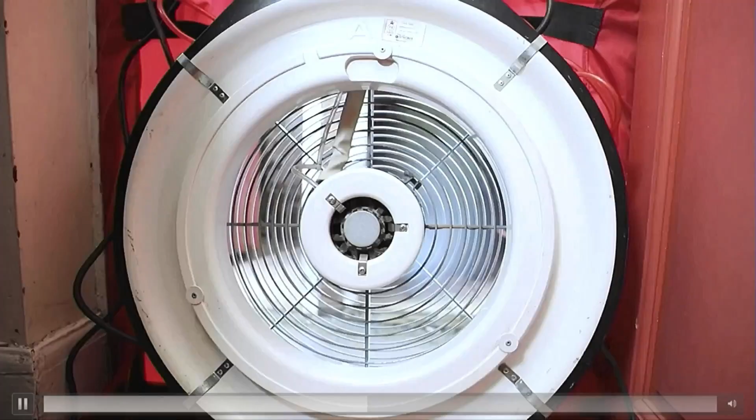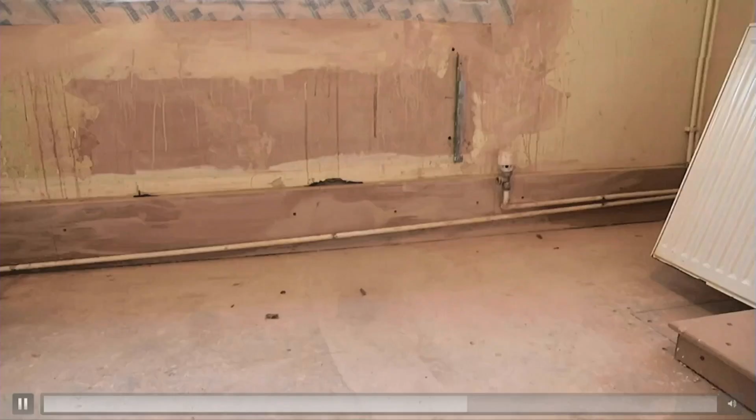We tracked the changes in energy efficiency by measuring before we did anything, the baseline stage. Then we did the retrofit work, and then we measured all of those variables again, which allowed us to see the effect that the retrofits had. Solid-walled homes can be at risk of having surface condensation, which is not a good thing to have in homes for mould growth and damp. When you insulate that wall, you tend to make the wall much warmer, so you'll have less condensation in general on the wall. But it does get a bit complicated because even with insulation, the edges can be cold, so you can still get condensation there.

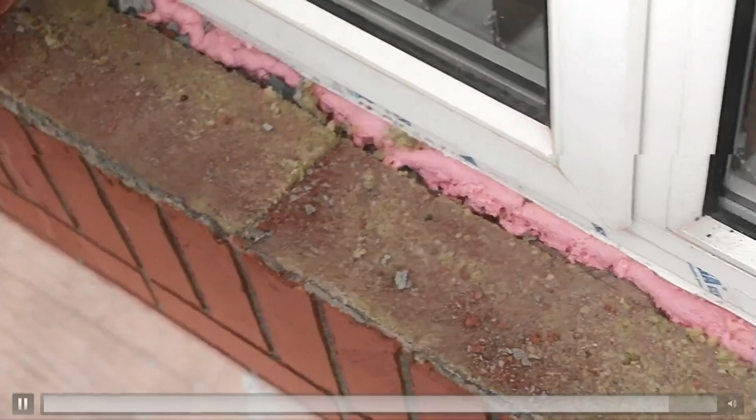So this is really good evidence to supply government with to make sure that retrofits are installed safely in homes, and this is what the whole house approach to retrofit has been designed for. So what we were able to do in this project was compare the energy performance certificate predicted savings with the measured savings. You might do an EPC and think there's loads of scope to do work to bring that number down, but actually your number was already quite low and the EPC got it wrong. I think a lot of people understand the importance of retrofit, but don't understand what can go wrong and the unintended consequences of retrofit. We understand more now about the risks of undertaking retrofits in a piecemeal approach, and we're providing more data to explain why it's very important to have a whole house approach to retrofitting homes.

It's a bit cheesy, but it's all right.

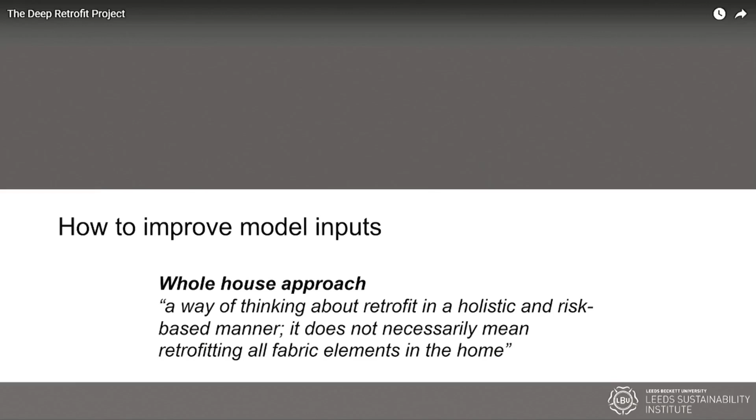So there's a much more dynamic way of introducing the project than me talking about it. So you've heard a little bit there, trying to boil it down a little bit to more tangible things.

Okay, what were the actual main goals here? So we think we've provided a lot of new information on how to decarbonise solid walled homes. When we publish our reports, that's going to be one of the key findings, and we'll talk a little bit about that today. We're also talking about the whole house approach, and that's just a little bit of a quote about it.

We come across this a lot, and it makes a lot of sense intuitively to think that the whole house approach means doing absolutely everything to a home. And that isn't what the whole house approach is. The whole house approach is thinking about everything so that you're able to install the thing you're doing in consideration of everything else. That's the key difference there.

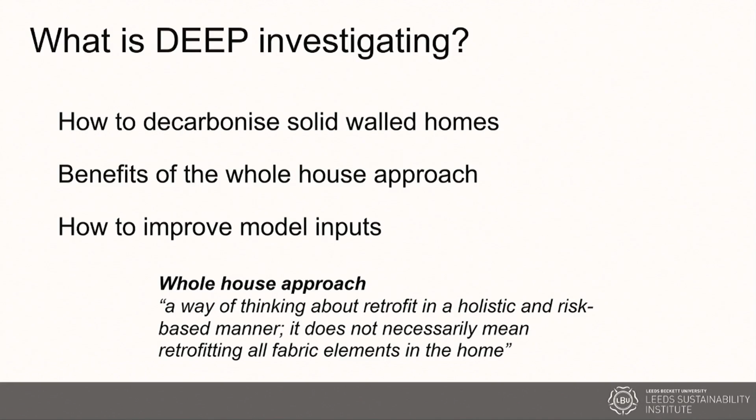And then the government - you all have EPCs for your homes, I'm sure. You all look at them and pay a lot of attention to them. But these are things that are in use and really important for government policy. So we were looking at how we could make improvements to the way in which they are undertaken, made more accurate. We'll talk about that a little bit today as well.

So the project is very big. You're only going to hear a little bit about some of the findings. We can't possibly give you an overview of everything.

So 3 universities here, it was funded by the Department for Energy Security. We had some other contractors involved as well doing some of the testing, and we're really grateful to the housing associations who let us have their homes. We rented the homes, but they let us in, which is a really, really difficult thing to get people to do.

So as I say, we started a long time ago. We are now just at the point of completing, and we hope to be able to publish the results very soon, not quite yet. So this is my last slide.

Thank you for coming, everyone. I'm Dr. Adam Hardy. However, as I am preceded by David Glew and followed by David Allinson and David Farmer, you can call me David, it's fine. I'll respond to David Hardy if necessary.

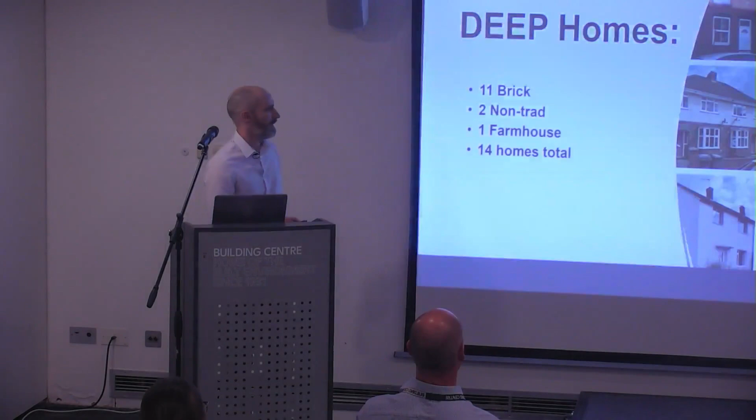So those are the homes, but what about the retrofits we did in the homes? We did 42 retrofits in total, comprising 7 air tightness retrofits. That's where we went around and sealed up any holes in the fabric that weren't supposed to be there, or for example, improved draft stripping on doors and things like that.

We did 4 loft insulation retrofits. Most homes will probably have some form of loft insulation already, but often that insulation isn't up to modern standards in terms of thickness, or if it is, it can be quite patchy because over the years it's been peeled back, or people have put things on top of it, meaning it's not so good anymore. So in those retrofits, we made a nice standard layer of insulation.

We also did 4 room-in-roof retrofits. This is where, if we had a room-in-roof room, we went up and took away all the bits of wall and the sloped ceilings in those spaces, and added insulation behind them.

We did 5 lots of retrofits where we replaced the windows and sometimes the doors. Then we did 12 retrofits where we installed floor insulation. We did quite a lot of these because it was thought floor retrofits might be an untapped market, and we were interested in what potential could be achieved if these were retrofitted en masse.

We did 5 retrofits of solid wall insulation. 3 of those were fitted externally, so external wall insulation where you fit it to the outside of the property. 1 was fitted internally, and the final one was a hybrid where we did part of it with external wall insulation and part with internal wall insulation.

And then the final 5 retrofits were what's called a whole house approach. This was alluded to in the video, but it needs a little care taken because it is not going to a property and retrofitting everything at the same time. That is not the whole house approach. The whole house approach actually refers to having consideration about how different insulation products interact with each other.

For example, often if you fit external wall insulation, that insulation won't reach all the way up the wall because the roof gets in the way, so you'll have a strip that's not insulated. A whole house approach would come in and fix that strip, probably by fitting some internal wall insulation. So it's about ensuring you have a consistent stream of insulation all around your property.

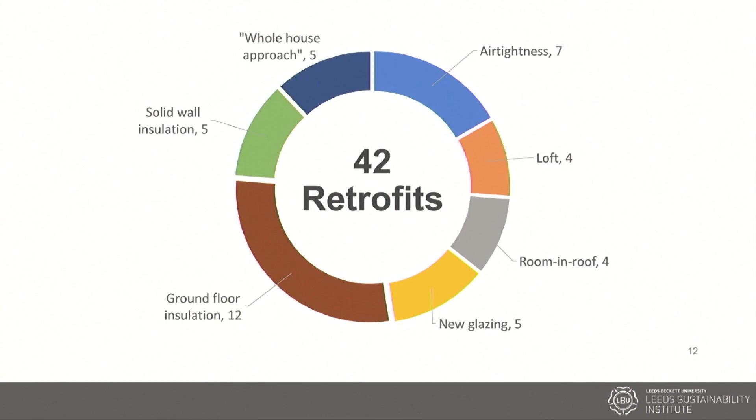So the attentive amongst you will note that if we had 14 homes and we did 42 retrofits, we must have doubled up somehow, and that's what we did. A typical retrofit strategy would look something like this. We take a home that's had nothing done to it by us, and then we did a series of tests on that home. We would test its thermal performance by something called the coheating test.

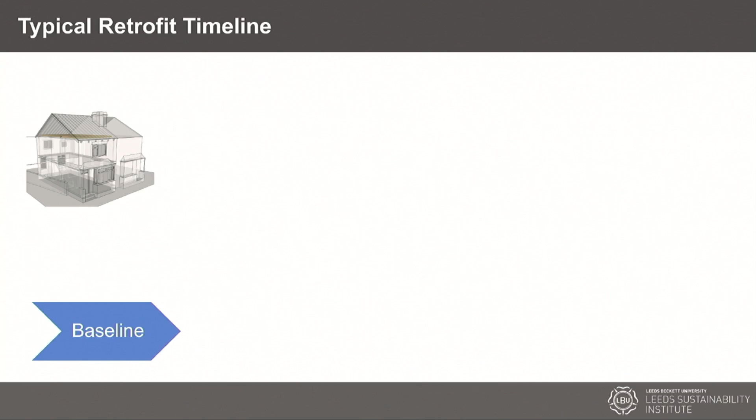We would test its air tightness. We would do thermal imaging of the home. We would do a whole bunch of other tests, and we would also do lots of models of the home, and I'll come into that in greater depth in a bit. Then we would go ahead and have a retrofit done to that property.

In this case, it was loft insulation first, and then we repeated all of those tests again. So we do a coheating test, our air tightness tests, everything. We do it again. Glazing retrofit, again, same. We repeat all of our tests.

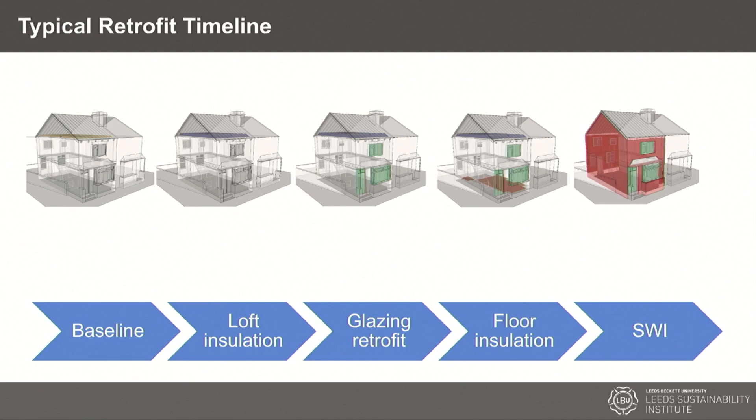The floor insulation retrofit, and then finally, for this home, we did the solid wall insulation retrofit, again repeating all of our tests. The order of retrofits, we tended to try and do from the most simple, like loft insulation, to the most technically complex, on the basis that these are probably the ones people are most likely to do, to the ones people are least likely to do.

And you can imagine if we were doing all of those tests at every stage for 14 homes, we gathered a lot of data, and that data was used to help inform the goals of the DEEP project. I'm going to touch on 3 of the goals we studied, but we've only got 15 minutes, and this is a massive project, so I'll only be able to scratch the surface. The first goal was to study the energy-saving potential of those different retrofits. How effective is loft insulation compared to room-in-roof insulation, for example.

So to illustrate how this worked, we'll go back to that house I displayed just now. I'm going to look at the results of the coheating test. The coheating test gives you a value called heat transfer coefficient, or HTC, which tells you how much heat loss you're getting from your property, so you want this value to be as low as possible. In the baseline case, when we hadn't done anything to the property, the value was 250, which is fairly high.

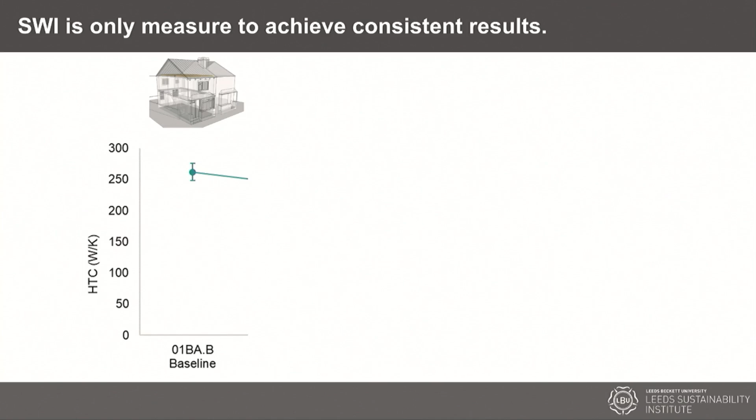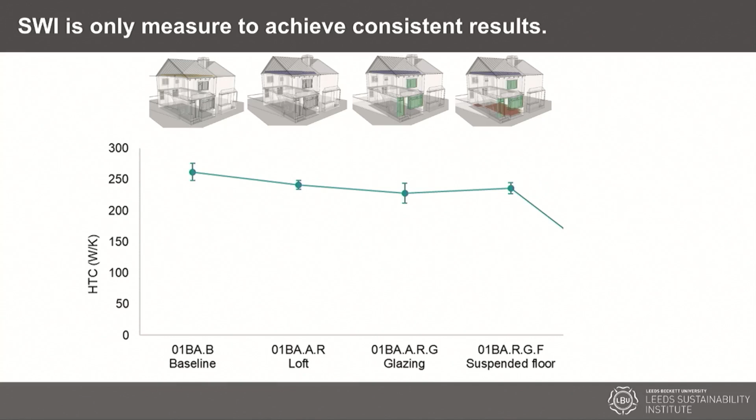We then did our loft insulation retrofit, and it looks like it drops a little bit, but actually these numbers are really close together, and statistically we can't tell the difference. So there's not a detectable impact of doing the loft insulation. We did the glazing retrofit and found the same. We didn't detect an impact from the glazing retrofit. We did the suspended floor retrofit, and again, we didn't detect one.

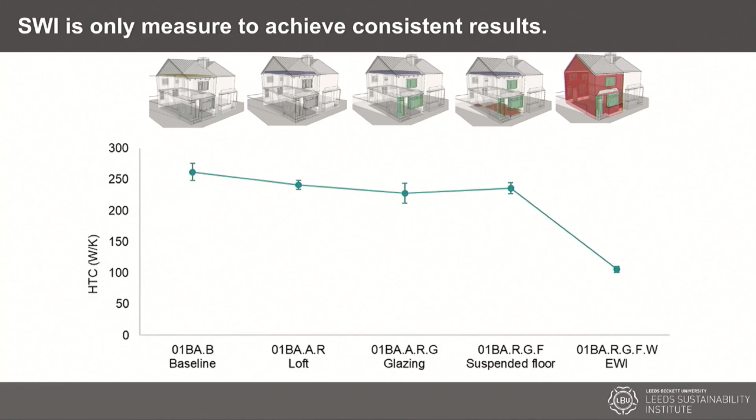Then we went and did the solid wall insulation retrofit, and there was a massive drop in HTC. We went from 250 initially down to about 100. So although this is just one of the 14 homes, the story of this home is quite typical of what we found in a lot of the other homes. The easier retrofits, like loft insulation, often didn't have a detectable impact on the heat loss of a property. Whenever we did solid wall insulation, whether internal or external, it did have a detectable impact on the heat loss. So from a policy perspective, if you want guaranteed reductions in heat loss, solid wall insulation is a pretty good bet.

On to goal 2 then. We were also interested in the unintended consequences of retrofit. And when I say unintended consequences, principally here I'm referring to moisture. If you put insulation on some surfaces, you can cause moisture to build up, which leads to mold, and none of us want mold, so we wanted to make sure that isn't going to happen.

When you did various retrofit measures, the risk of moisture tended to decrease or potentially stay the same, but it didn't get noticeably worse. When you fit the solid wall insulation, in all cases, the percentage of junctions that have moisture risk did decrease noticeably.

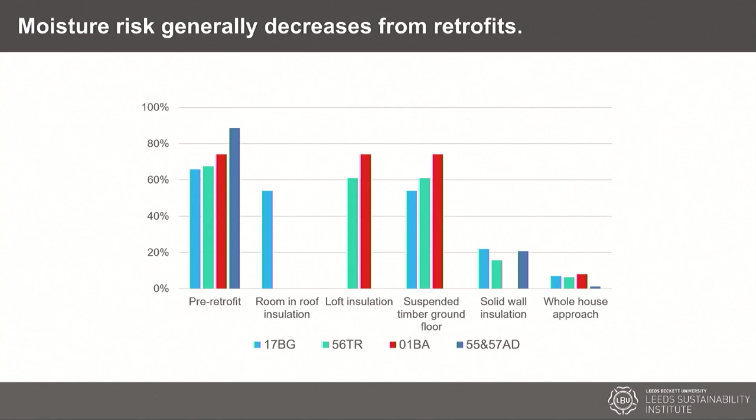But the final retrofit, the whole house approach, is the final step to really minimizing your risk of having moisture on your junctions, which instinctively kind of makes sense. As I said before, if you fit your external wall insulation and don't quite do the top bit, you're going to have a nice area of cold wall where moisture is going to form. Your whole house retrofit would come and fix that, making it warmer, thus decreasing your risk of moisture.

The third goal was to look at energy models, see if they're working as intended, and look for any ways that they can be improved. Energy models are pretty important because they're often used to assess how a property is performing and therefore what retrofits you might want to put into that property.

We're going to assess various energy models on this graph. On the x-axis is the coheating HTC, which is what we measured for the thermal performance of a property. On the y-axis, I'm going to plot the modelled HTC from a series of different models. If the model is spot on, in agreement with the coheating test, it's going to fall along the black line, so that's what the models ideally want to do.

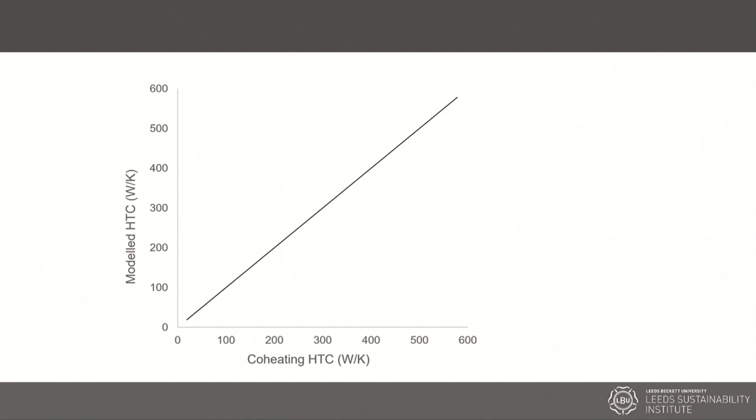The first model to look at is that generated by Energy Performance Certificates. You're probably all aware of these, as your home probably has one, and they're often used to inform retrofits, but they consistently predict HTCs which are higher than what we measured. The disagreement between the EPC HTC and the coheating HTC is worse for poorer performing properties.

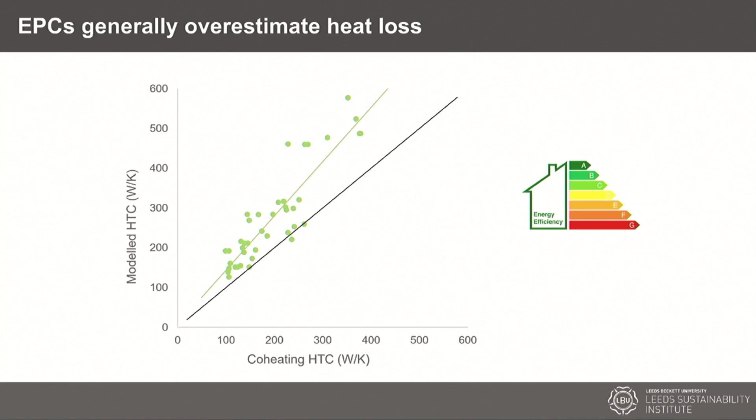This has potential implications if you're going to use EPCs to perform retrofit, because they're probably getting your heat loss number wrong in the first place, and if you're in one of the poorer performing properties, that difference is even worse. So EPCs are quite a blunt tool anyway, and built into them are lots of assumptions about how your property is behaving. So we wanted to see if EPCs could be improved by changing those assumptions to be more realistic.

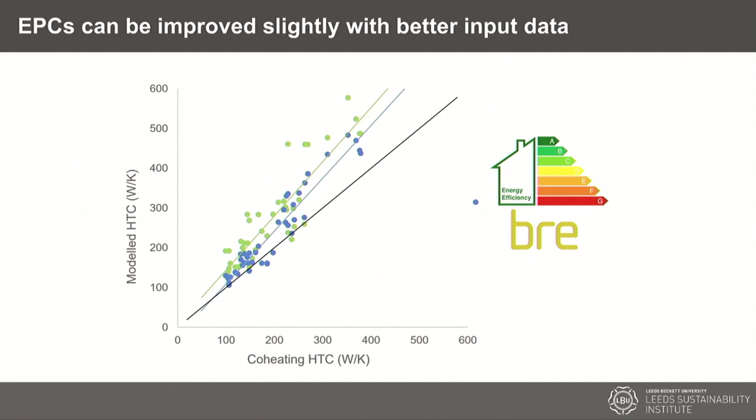So we broke into the software to change those assumptions, using a tool developed by the BRE. By changing those assumptions, the results did improve in that they've dropped closer to the black line, but still they're quite far away, and still show the same pattern of being worse for poorer performing homes. So it's potentially not just an issue of flawed assumptions within the EPC models. There may be something in the algorithm itself, the system of making EPCs, that could do with some tweaking.

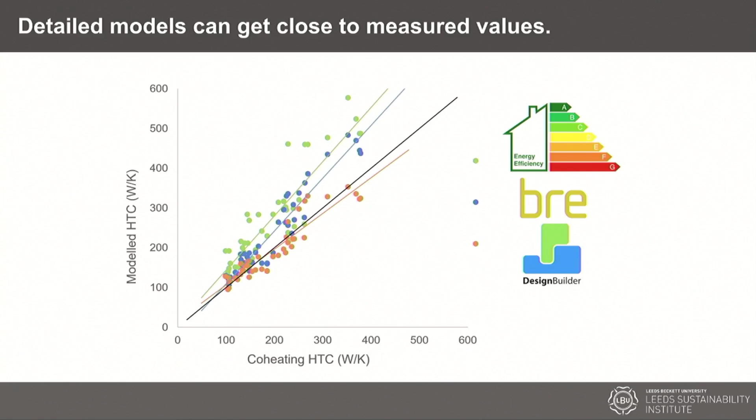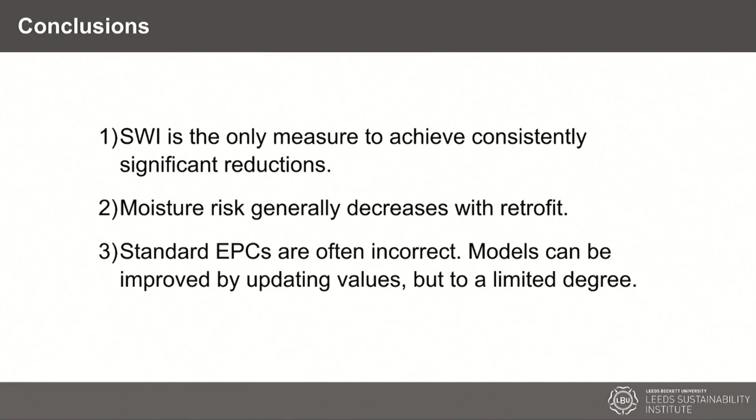To conclude from these three points: the only retrofit measure that achieved measurable differences consistently was solid wall insulation, so if you want considerable savings, that's potentially one to focus on. Moisture risk generally decreases with retrofit, but if you really want to decrease moisture risk, the whole house approach is excellent for doing that. And standard EPCs are very often wrong. You can make some tweaks to make them a bit better, but it only goes so far, so that should be considered when people are using them to plan their retrofits. That's all from me, and I'm passing over to David Anderson.

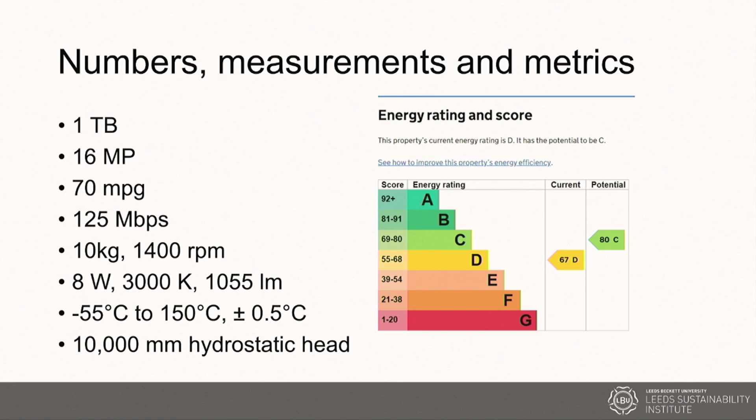There's another type of metric in my house that I'm less fond of. First of all, it's not very good, I'm afraid, but secondly, it's got some problems with it. I want to talk a little bit about problem metrics and the curse of uncertainty, as I'm going to call it. One of the problems with EPCs is they're based on running costs, and that's tricky because the running cost for your house depends on how you operate it, the weather, and the cost of fuel. So when my EPC was generated, the cost of fuel was nothing like it is right now, and no one could have guessed that. So that metric's a bit dodgy because of some of the assumptions that underlie it and the uncertainty in those assumptions.

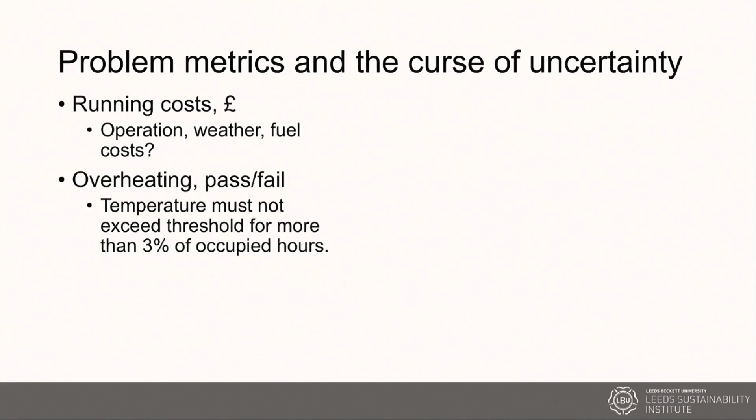There's two other dodgy metrics I'm going to mention. One is overheating risk, which is pass-fail. In the way we assess this in official documents, it says that temperature must not exceed some threshold for more than so many hours.

And it's the same with moisture risk. Again, it's a pass-fail metric. It's like saying my jacket is waterproof or not waterproof. It says that the relative humidity levels at some critical junction must not exceed 80% for more than a month. Well, that's one of the ways that it's assessed.

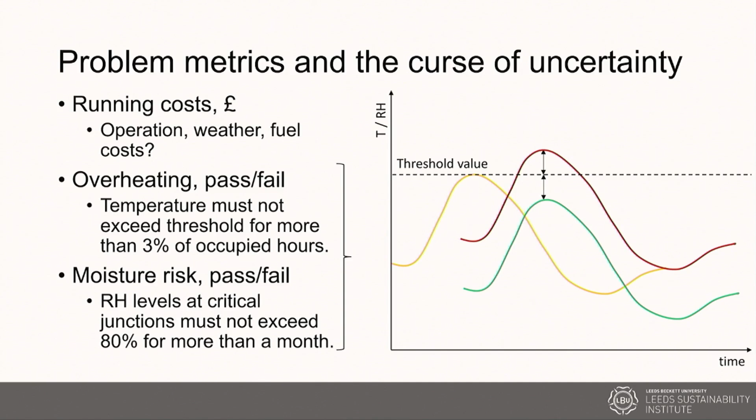The problem with these pass-fail metrics is if you have a temperature relative humidity profile against time, and you put some threshold on there, well, what if there's some error in that measurement? Or what if there's some error in that model that's created that profile? Maybe the true value is actually a bit lower than that value, in which case it's safe, you needn't worry. Or what if the uncertainty means it's a bit worse than that value, in which case it should actually be a fail. So pass-fail metrics are really problematic.

What would make a good metric? Well, it should be predictable, useful, and comparable. It's going to help you make decisions. Should I do this or should I do that? Is this thing better than that thing? For my waterproof jacket, I want the 10,000, not the 5,000.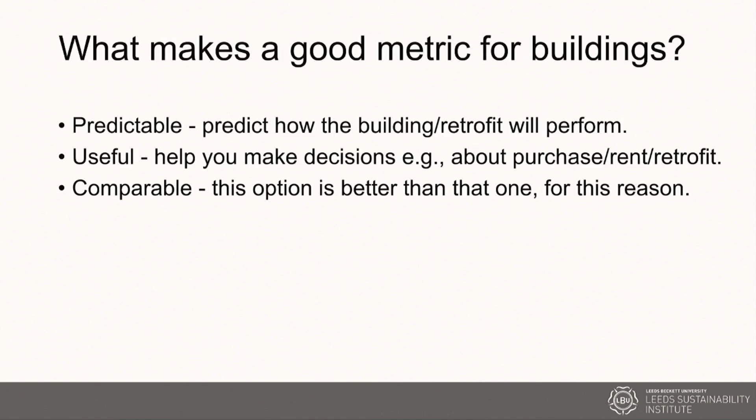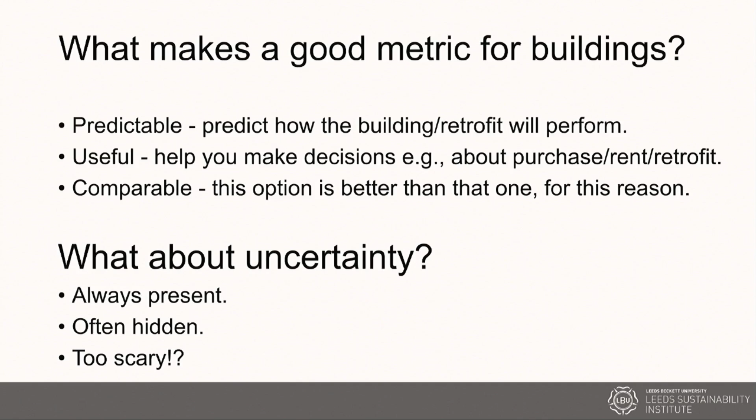And what about uncertainty? Well, it's always present, it's often hidden, we don't like to talk about it, and it's maybe too scary. Someone in a government department once said to me, there's no such thing as uncertainty in policy. And that sort of struck me as a scientist, because uncertainty is fundamental to everything we do. So how do we communicate across that divide?

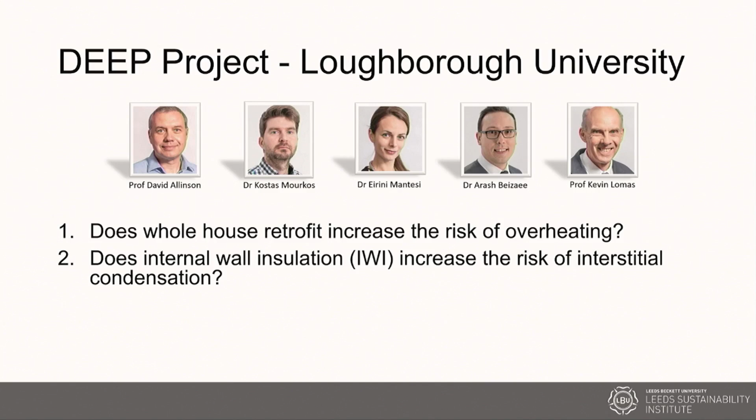So at Loughborough University, we were tasked with answering two questions, myself and my colleagues here. Does whole house retrofit increase the risk of overheating? And does internal wall insulation increase the risk of interstitial condensation? So Adam was talking about surface condensation on the inside. I'm talking about interstitial, between the layers of the fabric, that hidden moisture risk.

So the first thing I thought is we need better metrics that are robust to uncertainty, simple to use, and easy to communicate. And you're my guinea pigs. I'm going to see if I got that right. And you can tell me at the end.

So the first question, does whole house retrofit increase overheating? So we used TM59, dynamic thermal modeling approach. If you don't know what that is, don't worry. It's something that's used in the building regulations. It's like a standard way to run models to say whether they overheat or not.

We looked at 3 locations before and after a whole house retrofit, and we looked at simple mitigation strategies. What if people opened their windows more? And what if people had external shading? Would that help? We did it under current weather, and we looked at what would happen in the 2050s, 2060s climate. And we used 10-year weather files.

I'm quite proud of this. I think this is quite good. It's our new method. Let's see what you think. We're calling these recent weather decade files for building simulation. They're easily created. We just take 10 years of weather observations from any location, and we can create a file from those. And they're available in various places.

So what do we learn from this? First of all, overheating can occur in London and sometimes in Manchester. Bit of overheating in London, not very good if you live in London. Only a little bit in Manchester. Glasgow seems quite safe. Retrofit can increase the overheating in the building that is single-sided vented only. So where you don't have cross-vent, the retrofit can actually make the overheating worse. It goes from 4 years to 10 years, 1 year to 3 years, no years to 2 years in Manchester. So if you've only got single-sided vents, could be a problem with retrofit.

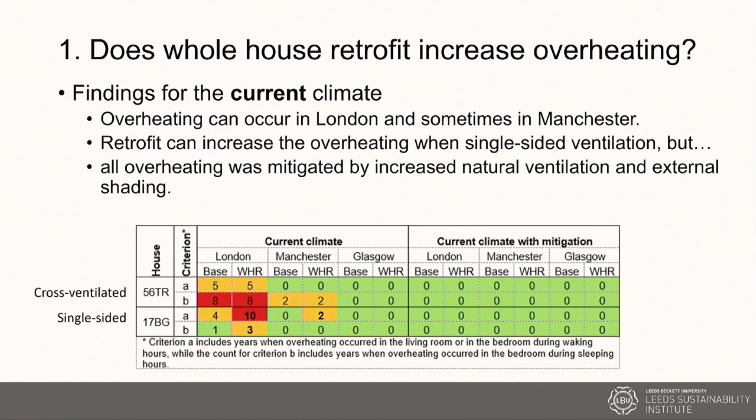But the good news, all overheating in all locations, in all homes, was completely mitigated when you increased natural ventilation and provided external shading. So under a current climate, we should not worry about retrofit and overheating.

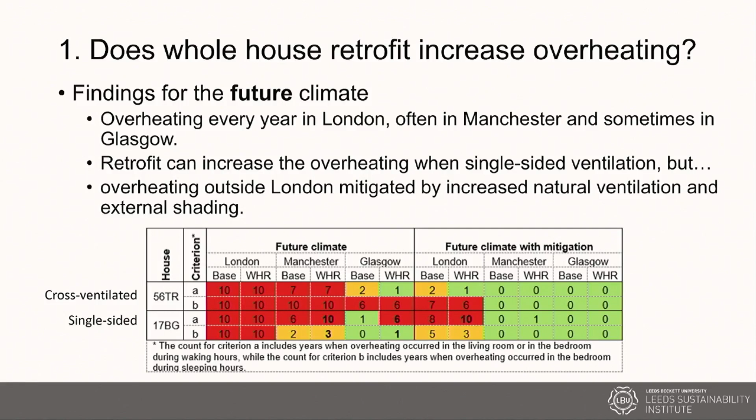What about in a future climate? Anyone here live in London? Yeah? Oops. So, in the 2050s and 2060s, we're going to see overheating every year in London, often in Manchester and sometimes in Glasgow. Retrofit can increase the overheating when you have single-sided ventilation, again. So those flats that you can only ventilate through one facade, we might have to watch out. But outside of London, overheating was mitigated by increased natural ventilation and external shading. So outside of the southeast, we probably don't have too big a problem with overheating in the future. But I'm afraid in the southeast, it's looking quite likely that there will be a problem.

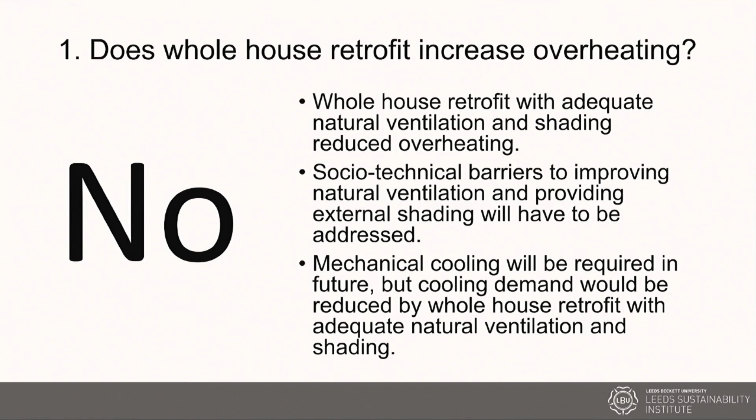So does whole house retrofit increase overheating? No, that's what our results found. Whole house retrofit with adequate natural ventilation and shading reduced overheating. You're stopping that heat coming in, it's a good thing. There are, though, socio-technical barriers to improving natural ventilation and providing external shading, and we have to address these. You can't just tell people to leave their windows open all day and night. That doesn't work for a lot of people. So there's some space for innovation and new solutions to how we ventilate and how we shade our homes.

In London, I think you're going to need mechanical cooling. But the good thing is that when you've whole house retrofitted with all that insulation, that's going to reduce your demand for cooling anyway, so it's no bad thing. So we've got no problem with retrofit and overheating.

What about interstitial condensation risk? This is where you get moisture between the layers of the building, can cause timber joists to rot, subfloors to collapse. It's quite a bad thing. Internal wall insulation is suspected as being a problem for this. We used a validated hygrothermal modelling software. It's just another modelling tool, a standard one. We modelled a typical solid brick wall. We looked at 2 wind-driven rain locations, London and Manchester, some different thicknesses of insulation. What if we make the U value lower and lower and lower? What happens? Different vapor permeable and vapor impermeable insulation.

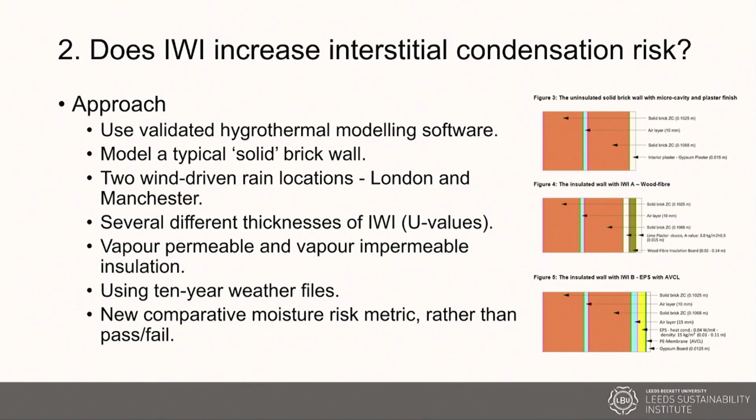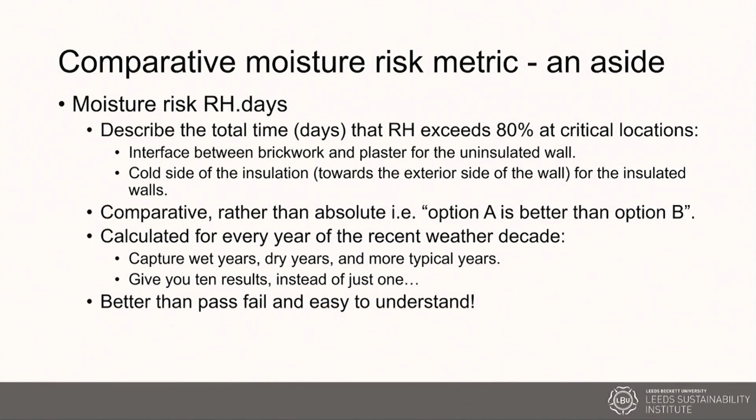We used our 10-year weather files again because they're good, and we used a new comparative moisture risk method rather than a pass-fail. So quick aside, our new metric is called moisture risk relative humidity days. It's a little bit like cooling degree days, I suppose. It describes the total time in days that relative humidity exceeds 80% at some critical junction, so this is like between the insulation and the plaster for internal wall insulation. It's comparative rather than absolute, so you can say option A is better than option B, a little bit like my waterproof jacket, and it's calculated for every year of the recent weather decade. So you get wet years, dry years, and all the years in between to give the model that variability. Better than pass-fail, easy to understand.

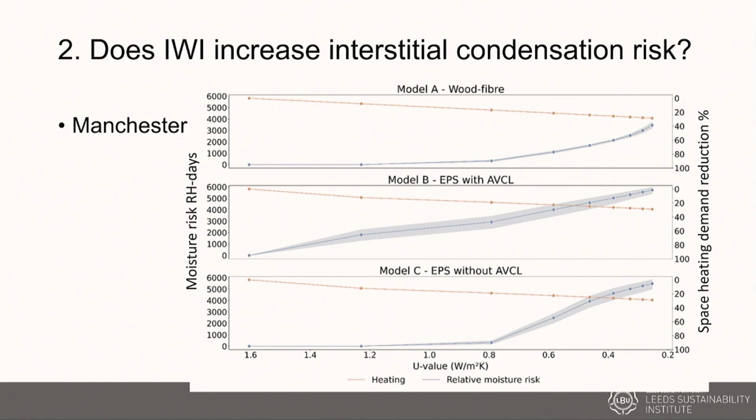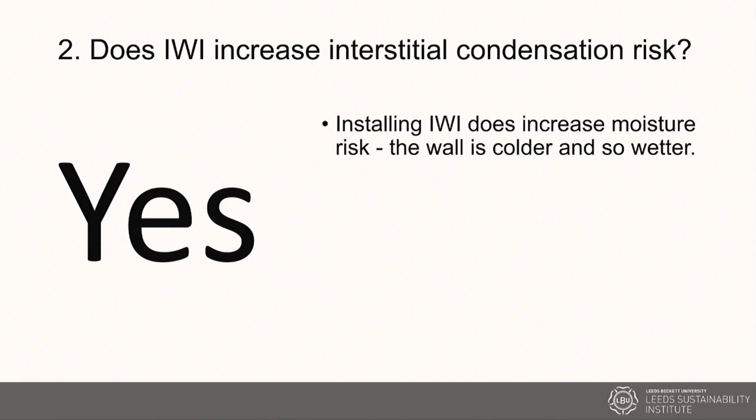The wood fibre insulation did better than the vapour permeable insulation, which did better than the vapour impermeable insulation as well. But there isn't a massive difference. So, does IWI increase interstitial condensation risk? Yes. Installing it makes the walls colder and so wetter. As a building physicist, this isn't a surprise. That's just how things go.

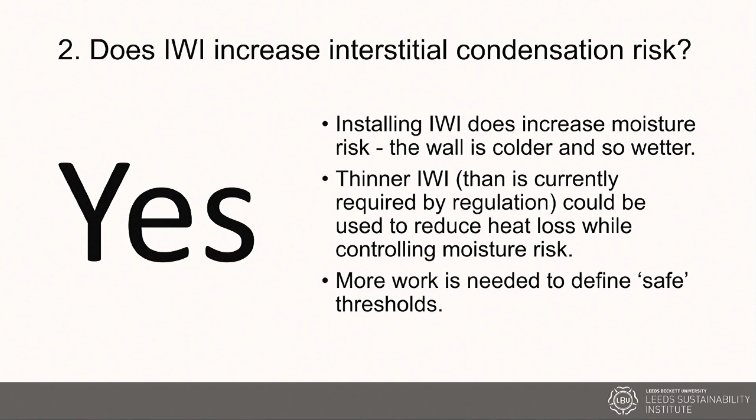But thinner IWI than currently required could be used to reduce heat loss and control moisture risk. More work is needed to decide what's a safe threshold. How many moisture RH days am I prepared to have before I might get a problem? And we need to do field work for that, not modelling. Models are good for some things, but not others.

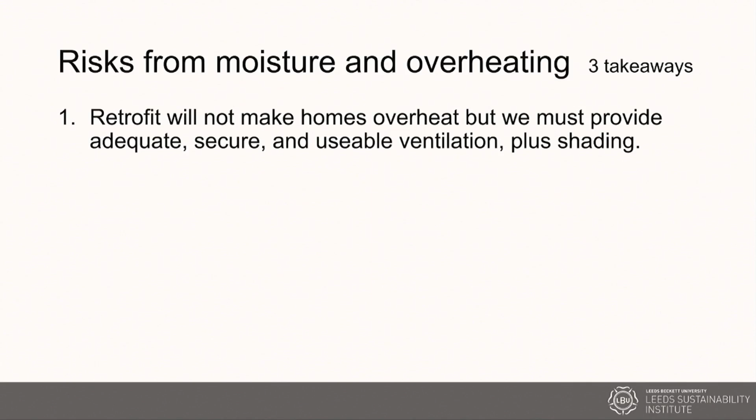So I want to give you 3 takeaways to finish. Firstly, retrofit will not make homes overheat, so don't be afraid of that, but we must provide adequate, secure, usable ventilation and shading. This is a space for innovation, I think. IWI does increase the risk of interstitial condensation, but perhaps there's an opportunity with thinner IWI where you can get a good balance between energy savings and risk.

And then I think that these comparative metrics are more robust than pass-fail metrics, and 10-year weather files help to communicate uncertainty. I'll be interested to know what you think during the Q&A.

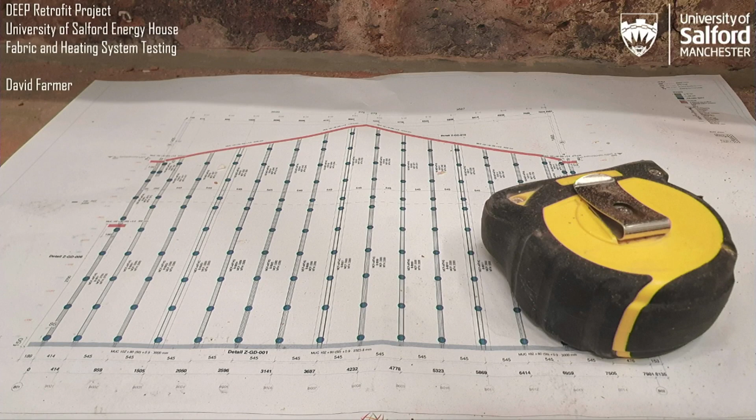Hi, I'm Dave Farmer. I'm a research fellow at the University of Salford, where I run the Salford Energy House. I'm about to pretty much repeat everything the last 3 Daves have told you, but I'm hoping I've got a couple of bits and pieces in here that might be a bit new to you. So I'm going to describe what we did at the University of Salford in our Energy House testing facility during the DEEP project. A lot of this you know already in terms of what DEEP was about.

So our main focus here was actually Leeds Beckett did a lot of work in the field, tested a lot of different houses. Fieldwork's inherently complicated in terms of there's lots of dynamic patterns. It's quite difficult to assess the change in thermal performance from one retrofit to another because the weather might change day to day. So the tests have to be over a longer duration. The analysis is more complex.

So we decided to do a very detailed study similar to one that Leeds Beckett University did in the laboratory setting, looking at the difference between the piecemeal approach to retrofit and the whole house approach. So the definitions here, I think Dave Glew's already discussed what a whole house approach to retrofit is. And it encompasses many things, so it can be what Dave Ransom was talking about, damage to the fabric of the building itself, to the occupants, damage to the fabric through interstitial condensation, other factors like overheating as well.

This project was not intended to look at overheating or interstitial condensation. It was at the risk of surface condensation, so that's whether at junctions or surfaces, and that obviously could lead to mold growth.

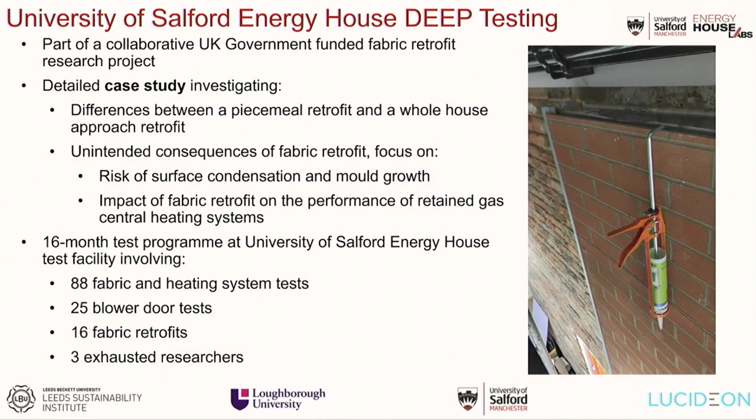So the work was done at the Salford Energy House test facility. They built a bigger and not better thing up the road called Energy House 2, so we're now called Energy House 1. It's a replica of a pre-1920s end terrace. We used to say it was representative of 7 million houses, but Dave's just told us every house is different, so now it's just representative of the Energy House. But we try to make it as representative as we can.

It's permanently sensed up with over 200 sensors measuring temperatures, internal environments, looking at all energy flows, whether that's each individual heating circuit, every output from every radiator, from the boiler, from the air source heat pump. So we're constantly monitoring all that data at 1 minute intervals.

We've got, as I mentioned, a central heating system. It can be fed by either an air source heat pump or a gas boiler. We've got infrared heating in there, a multitude of heating systems. We can also simulate domestic operation by automating appliance use, openings, etc.

So the main thing about the Energy House really is where it's situated. It's in an environmental chamber. We can repeat the conditions between tests. So essentially, every single test we did in Deep, whether it was looking at fabric thermal performance, all the measurements that Adam, sorry, I was meant to call you Dave, Dave was talking about earlier, steady state thermal performance measurements. We can create that steady state heat transfer, and we can measure it in the Energy House.

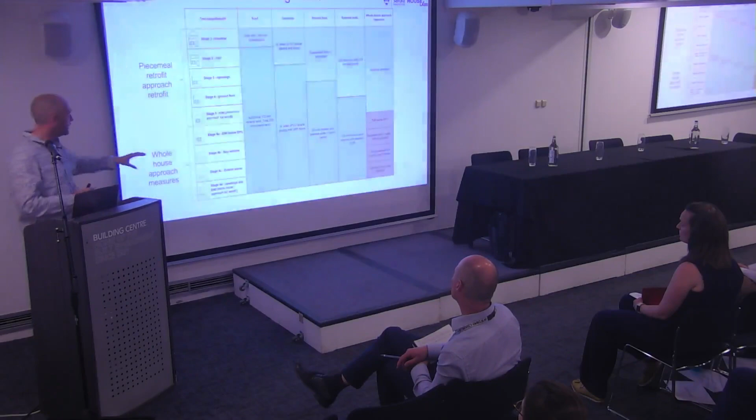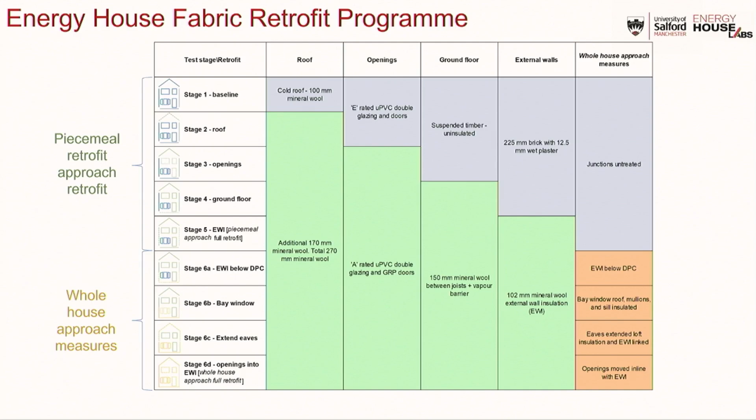And then, following the piecemeal approach, every element has been retrofitted, but we've not addressed the junctions. We then addressed each junction in turn that hadn't been addressed by the piecemeal retrofit, and measured the fabric performance and heating system performance at each stage until we end up at stage 6D at the bottom there, which is essentially your whole house approach retrofit, if you chuck the kitchen sink at a retrofit.

So in the piecemeal retrofit, everything was conventional. There were no aerogels, magic paint, pretty much mineral wool, bog standard retrofit. We calculated the U values of the existing elements, and then asked the installers to just meet Part L1b. We made sure that we were doing that by the specification, and then we asked them to just do it as they would in the field. We didn't ask them to do anything extraordinary.

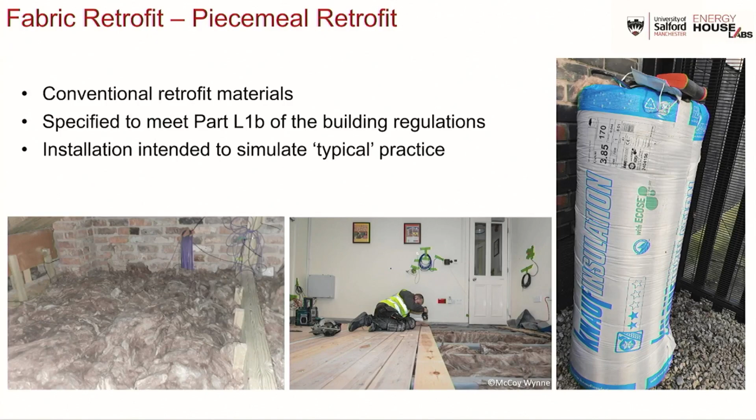We asked them to price it based on the amount of time a retrofit would take in the field. So it wasn't intended to be a best practice or to reach any set standard in terms of air tightness levels. It was just trying to replicate what might happen in the field, so essentially most of it was very, very conventional.

The only difference really was the EWI retrofit, still mineral wool, but effectively it was a system approach, a steel frame system. Initially, the manufacturer came in, performed a scan of the energy house, and built a 3D model. The picture from the introduction slide showed all the steel channels that were prefabricated and cut, along with the brick slip cladding, which also came in prefabricated.

This allowed them to come in and, we hoped, retrofit the building a lot quicker than would happen in the field. We think it probably took about the same time as a standard EWI retrofit, but there were certain challenges, as you can see, with scaffolding in terms of working in the energy house.

The key thing is, you can see here that we left out certain details which would be considered in a whole house approach retrofit. This is where you might find below DPC level on a solid wall home, so we didn't insulate that. You can also see the EWI only went up to the fascia board, so the thermal bridge that Adam was talking about earlier wasn't addressed.

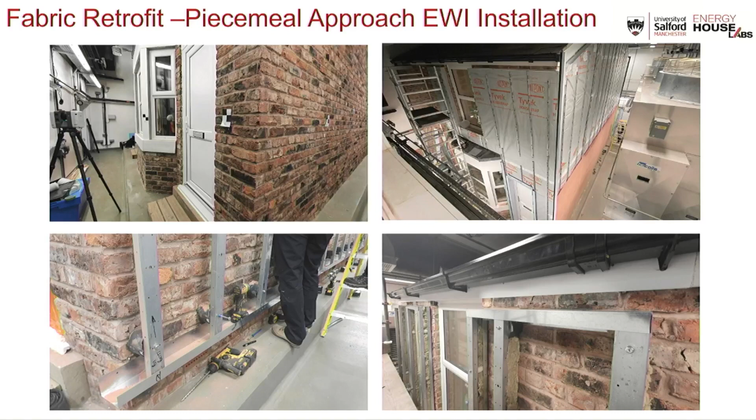Effectively, what this EWI installation was meant to do was replicate what you might go out and see mainly in the field. We then followed that up with what we call our whole house measures, which went by simplicity and cost. The cheapest and quickest was just insulating below DPC level with the EWI, extending that down below.

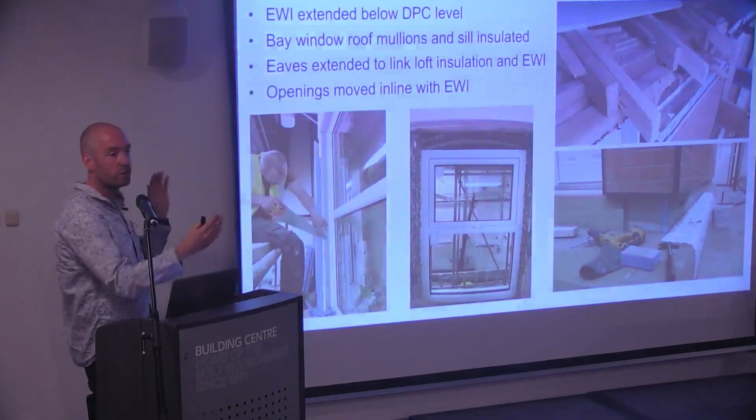We then followed that up with a bay window retrofit, which effectively put EWI over the whole bay window. The reason it wasn't addressed in the first place was a contractor told us they wouldn't normally bother, it took a lot of effort. And in fact, the bay window retrofit did take a lot of effort because the two side windows of the bay window had to be removed, since the geometry of the building had changed, so they needed to be smaller as they were brought out in line. It was a complex issue which again wouldn't be addressed by a standard retrofit.

The third measure was extending the eaves. This was, I think, the most important one. You can see that with the eaves now extended, the rafters extended, the insulation layer was brought to meet the loft insulation and down to meet the external wall insulation at this interface here.

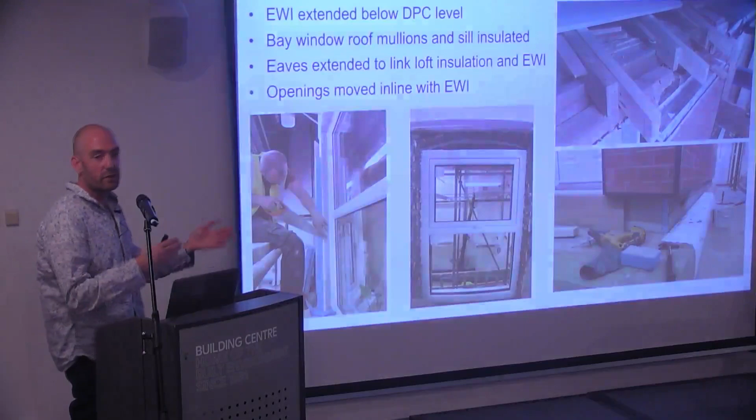And the final one, considered the best practice retrofit approach, was moving the windows and doors out from the inner leaf of brickwork into the external wall insulation layer. Effectively, we're trying to look at the difference each of these best practice retrofit measures, which you might find in a whole house approach retrofit, made in terms of heat loss and the risk at junctions.

This graph shows the risk of surface condensation and mold growth at all the junctions in the energy house. We measured that at 12 different junctions. These are based on spot temperature measurements, so we can't say this is definitive. And remember, always remember this is a case study, so never take anything I say here as gospel, and don't perform any of the measures I've mentioned here.

But effectively, we can see in these two risk categories here, Dave Allinson was talking about having these fixed risk categories, either it's a risk or it isn't. The BRE have a metric called the temperature factor. It relates to the ratio between the surface temperature and the internal and external air temperatures. They say anything below 0.75 is considered a risk of surface condensation and mold growth; above that, you're fine.

We started off with three-quarters of the junctions in the house at risk of condensation and mold growth, and pretty much nothing really happened until we added the EWI. At that point, we basically flipped to most junctions being low risk. So the EWI essentially created a healthier internal environment.

That's pretty much because external wall insulation interacts with almost every element in the house. So if you're insulating the ground floor, it does nothing for your eaves junction. If you're insulating your roof, it will do nothing for the junction between the walls and the ground floor.

Following that, we'd done the whole house piecemeal retrofit. We then started with the whole house approach measures, that's what we're calling them. Each stage - the first couple of stages, EWI and DPC - sorted out one of the risks at the ground floor. The bay window didn't do anything, and then extending the eaves got rid of the highest risk junction in the entire house, which I'll discuss in more detail next.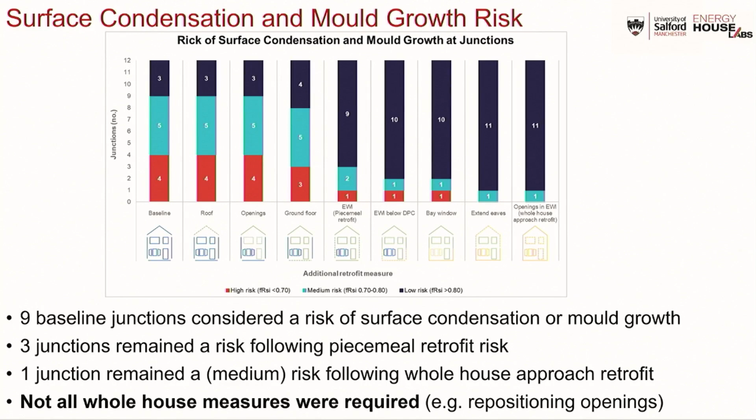At the end of the whole retrofit journey, effectively we had what we're classing as medium risk left, and that wasn't a fault of the whole house approach method. It was effectively the ground floor junction - there was a gap between a joist and the external brickwork, and it was too thin for the installer to put insulation between. So there's a practical issue there. It'll probably happen in other homes, but I can't say that's going to happen in all homes - it's not quite representative. Even so, we can say that the whole house approach certainly reduced risks in comparison to the piecemeal retrofit approach.

If we're looking at this eaves extension, you can see here the eaves is now meeting this tacky brick cladding that we got on there. And you can see the insulation now is meeting the insulation layer of the external walls. On these diagrams, the red means we're at risk of surface condensation and mold growth.

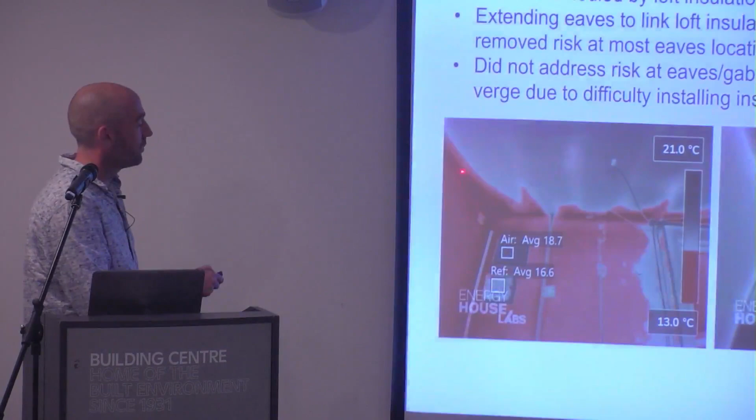This thermal image here was just after the first initial loft insulation retrofit. You can see that essentially the whole of the eaves junction is at risk, and also, with the solid walls uninsulated, pretty much most of the solid walls as well.

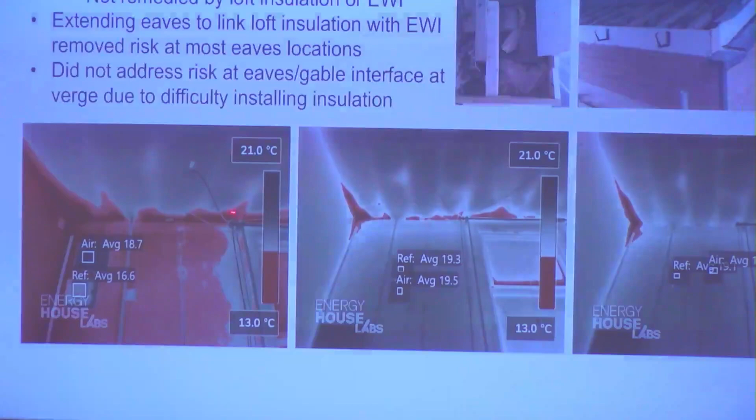We then put EWI on - this is after the EWI retrofit. Now you can see that the solid walls are pretty good, we can't see any risks on those, so that's good, we've eliminated that risk. But what you can still see along here is remnants of a risk along the eaves junction. So we haven't managed to remedy that with the external wall insulation because it left a gap between the loft insulation and the EWI.

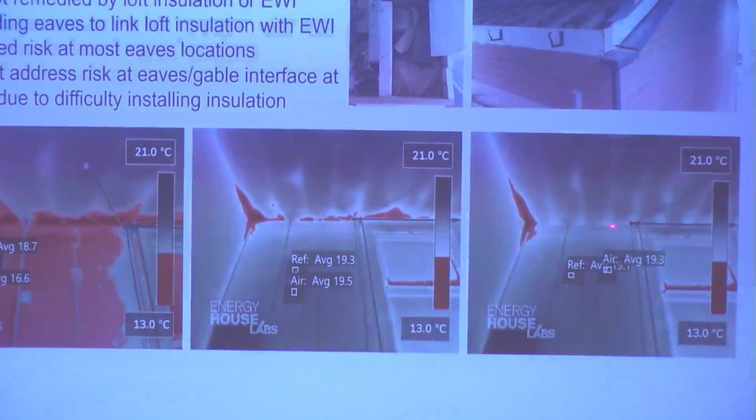Finally, we extended the eaves, and now we can see that junction is pretty much clear, but we've still got this issue here in terms of risk of mold growth and condensation at the verge detail - that's where the eaves meets the gable.

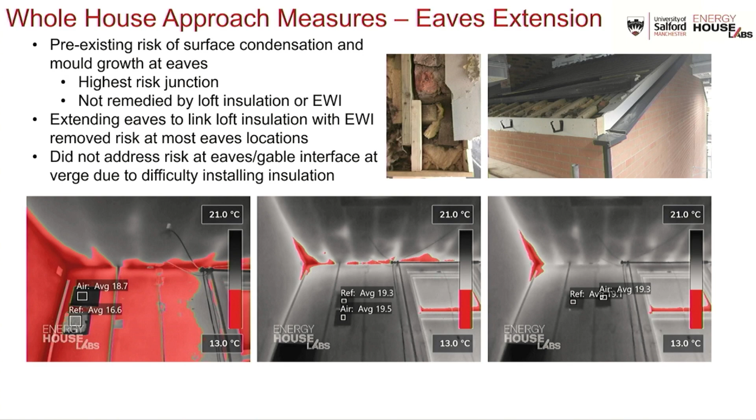If you look at this thermal image, during the deconstruction process we had a look at that detail, and you can see it's really difficult to stuff insulation into these small nooks and crannies. Maybe if they hadn't had to take the insulation out at the end, they might have stuffed some foam down there - maybe that would have helped, or maybe it would have caused other problems. But there are always these little issues that, no matter how well you specify, are very difficult to eliminate. We had that issue with the ground floor joist running parallel to the external wall, and again at this verge detail.

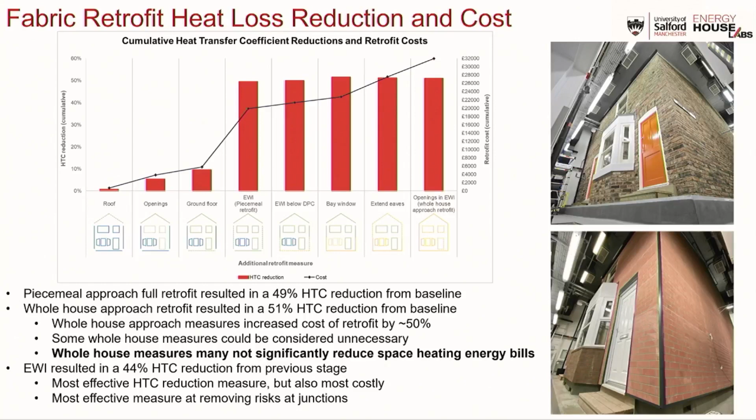So essentially, can we finance these whole house approach measures by saving on energy bills? It's unlikely. The main thing we take away is that some of these measures didn't actually make any difference to the risk at junctions. So it's really about picking and choosing which measures are appropriate and required at a given time.

I'll just get onto the heating system tests. At each stage of the retrofit we ran a SAP-based heating profile: 2 hours in the morning, 7 hours at night, 21 degrees in the living room, 18 everywhere else. We measured that with a 4.7 degree external temperature, typical of UK winter temperatures.

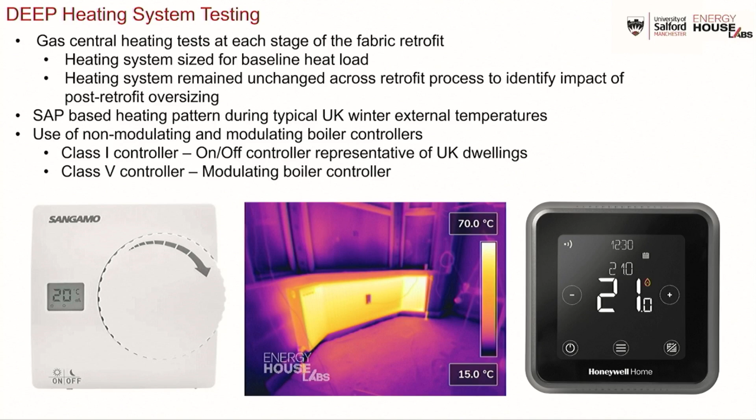We tested two types of control using this setup, looking at space heating, gas use, and efficiency. We found that as we progressed through the retrofit, class 1 controls, the on-off control, the standard old school boiler controller, had decreasing efficiency throughout the entire retrofit process. We lost 5% efficiency in our heating system due to the fabric retrofit, resulting in the system being oversized for its heat loss.

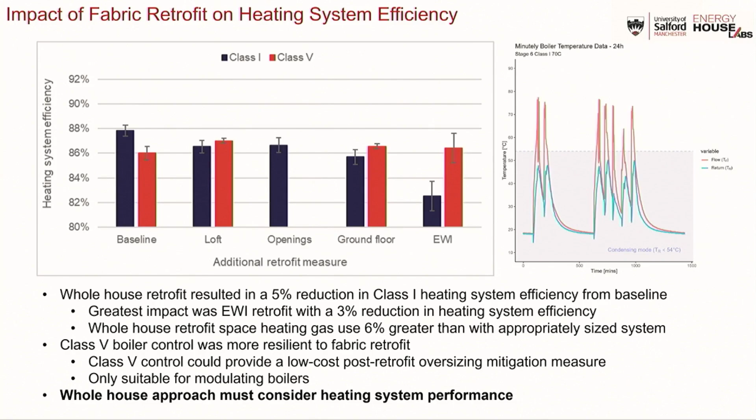The modulating controller, a class 5 controller, was not impacted by the retrofit. This suggests that if your boiler is capable of modulation, switching to a class 5 controller after a retrofit might help you avoid losing system efficiency. Without it, this house with a class 1 controller would have had gas use 6% greater than if its central heating system was appropriately sized for its heat loss.

So what can you do about heating systems that aren't suitable for modulating controllers? We reduce the flow temperature of the central heating system based on the new heat load of the house. We calculate the heat load and adjust the flow temperature to provide the heat input required for the new fabric heat loss. What was previously 70 degrees C became 50 degrees C, increasing the efficiency of the heating system and restoring those losses.

This isn't what the government are telling you to do by just turning your boiler flow temperature down by 10 degrees. This is an informed calculation based on your heat load, so you're not going to struggle to keep your house warm at colder temperatures or impact too much on heat-up times. So it's quite important.

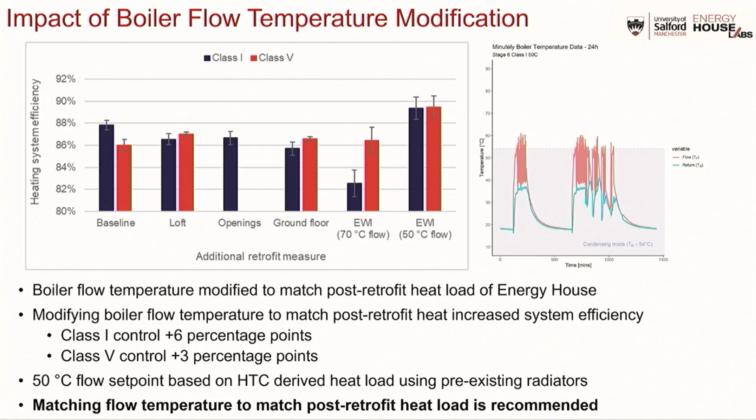For houses with older boilers where you can't fit a modulating control, we're suggesting we need good tools to inform householders what the heat load and heat loss of their house is, and what temperature setting they should set their boiler to, because there are a lot of missing gains they could be achieving. If you don't consider your heating system in your whole house retrofit, you could be undermining some of the gains in fabric.

That's pretty much what I said. Oh, and that's Grant - he nearly died doing this. We worked his socks off, so I want to thank him.

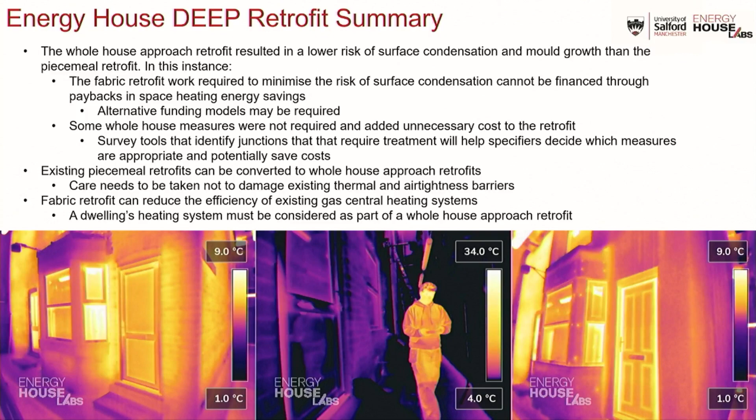What's next from this research? We've got to publish it, for sure. What we're trying to do is synthesize all of that mess into one big, nice story. So what have we done to improve things? What messages can we give government so they can improve policy? What messages can we give industry so they can improve practice? I think that's what we're looking at now.

Some of the individual findings have really nice lead-on opportunities for future research. For instance, some of the things around thresholds and changing the way in which we use weather data to improve models further. This is opening up tons of new research opportunities for us. Would any of you like to pinpoint a specific research opportunity from your area that you'd like to explore further?

Yeah, I think so. For moisture risk, there's this really interesting idea that you might still be able to apply IWI up to some kind of safe level. But what does a safe level look like? That's a really difficult question, actually. And moisture takes so many years to evolve. So I think that's going to remain a tricky longer-term question that needs more time.

Expanding on that, one thing we've seen is that some of those whole house approach measures, it's very difficult for a specifier to know whether they're required or not. So for identifying moisture risk, I think that's something I want to see more tools for, for people to be able to identify those and go into a house and look at it, because one of the things coming out of DEEP is that every house is different, and risks will be different in every house. Some of these measures are incredibly expensive compared to the payback times. So we need to identify which houses require these certain measures.

So the air source heat pump was thinking that the water coming back from the house was getting warmer than when it went out. A boiler wouldn't mind so much, but at no point did it ever tell us it was set up wrong - it heated the house fine, exactly the same as before - and we trusted the installer. We noticed it was wrong because it was costing a third more than it should be, or even more. If someone sat there with an energy bill coming in that's almost a third to a half higher than it should be, they're not going to know that. It's only because we said, let's investigate the problem here.

Based on the coefficient of performance we achieved before solid wall insulation, we're assuming that in this instance, as an end terrace, you needed the solid wall insulation before the air source heat pump became financially viable. Before that, gas outstripped it. But the interesting thing is that at the beginning of DEEP - because the ratio between gas price and electricity price keeps changing - the closer gas and electricity get, the more viable an air source heat pump becomes. So there are market factors as well as fabric thermal performance to address.